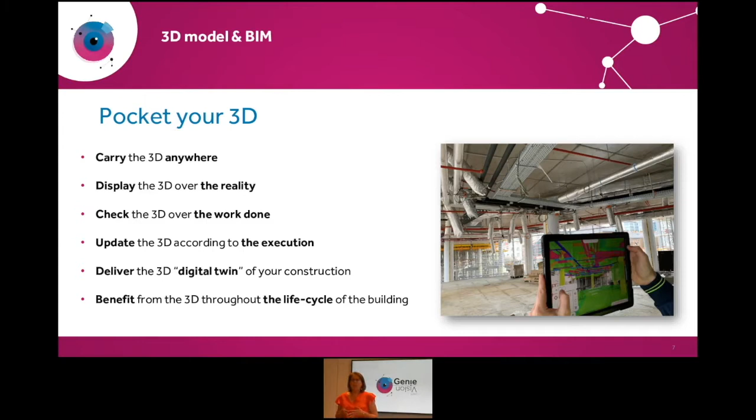Having this picture in mind, GenieVision has worked on building a solution which is open in the way that it's really easy to integrate into the ecosystem of a customer, using cutting-edge technologies as well, but for the end use of the user on site, focusing on collaboration and user friendliness.

So to summarize, we have a solution that allows us to carry the 3D model on site, to benchmark this 3D with the reality, and do different kinds of reporting to digitalize the documentation.

If we have to really briefly describe the work process of GenieVision, it's really simple at the end. We have a 3D model which is edited by a CAD system. This 3D model is loaded on a web portal, processed and made available through a mobile application for the operator on site doing this control.

So during the control, we collect different elements. Those elements we can retrieve back to the web portal. But I will stop here.

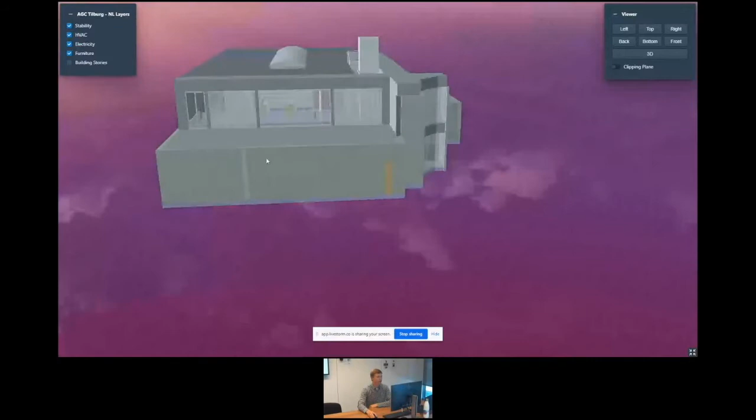We provide you with some viewing possibilities so you can manipulate your file, go around, do some clipping operation to analyze and see whether this is the version that you're interested in and if you're happy with what you have uploaded.

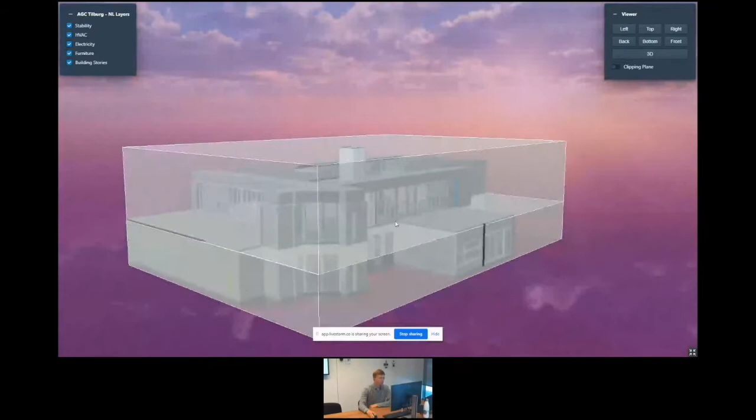We also provide you some useful information about how we are going to split your model into small pieces, most of the time only building stories. So these white boxes here are showing to the end user, to the BIM collaborator, how we are cutting the model into pieces.

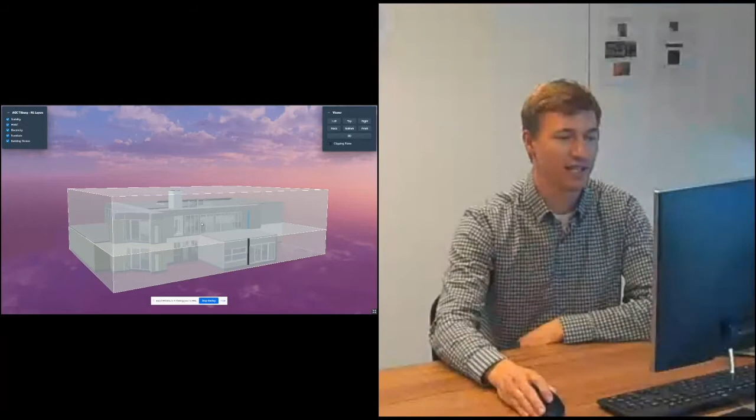We will also provide some tools to adapt these boxes, which are now derived automatically from the model. But once we complete our development for next September, you'll be able to manipulate these boxes and decide where you want to cut your building and in how many pieces.

Going back to a new project, in here I've got a stability file that was uploaded earlier. I have many different versions of that stability file in IFC, Revit format, or IFC zip.

And for the sake of the demo, I will upload an electricity file in this additional folder here. So the process has been developed to be very, very simple: you just take your file, upload it, and an automatic data transformation process is triggered.

This is triggered on our server on the cloud. While it's processing, I will guide you through the other tabs. You've got members, where you can...

add all the members of your organization or invite new people to your project. Once you invite people, you can decide to assign them a role that will limit or give them possibilities to work on your project.

All these people invited to your project as members will gather many issues that will add up along the way, and that will populate gradually our database with your as-built documentation, because you will have pictures of reality, pictures of augmented reality, and some documentation all along your project. All our pictures are located in 3D within your building, so it makes useful information at the end of your project.

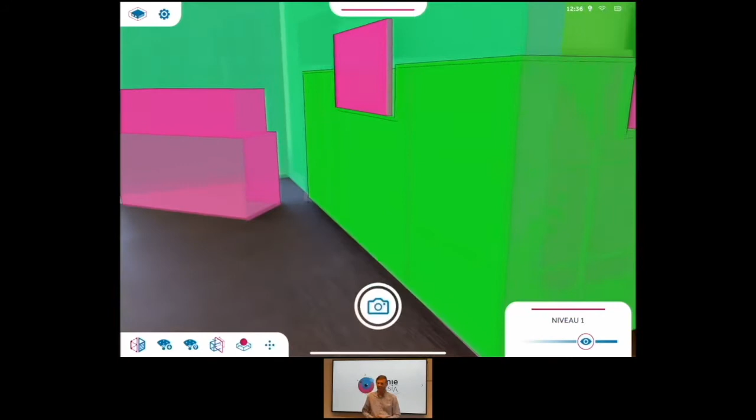This process will be soon fully automated in the next release, so it's really coming in a few weeks. So here, I'm just checking at that place the alignment, and I'm saving the position. The objective to save that position is that myself or even a colleague can come back afterwards on that exact place and relocate himself in 3 seconds with an already calibrated model. So that's clearly the purpose.

So here, let's say I'm coming back the day after, and I'm relocating on that place where I have saved my point before. As you can see, in 3 seconds, the model is exactly calibrated and aligned on the position where I have saved it. I can easily also check with the transparency if all elements are on the right place.

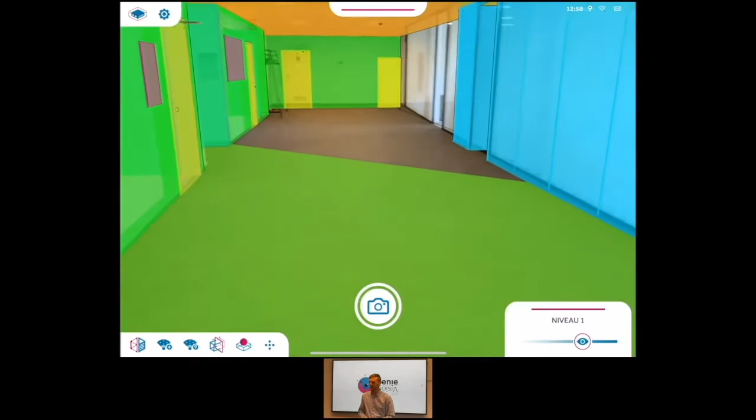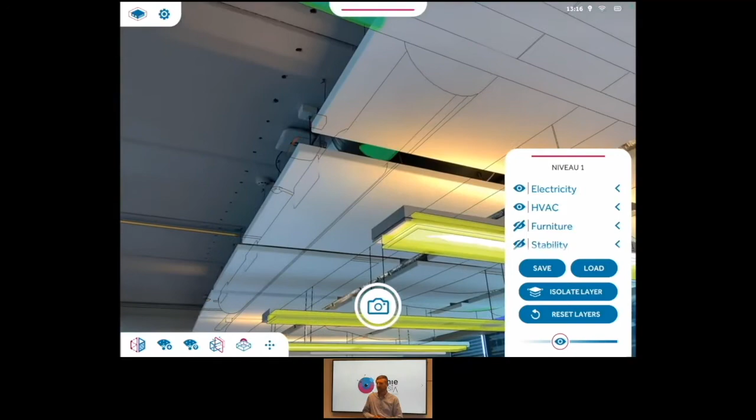So I'm entering in another room, and I'm going to check some techniques on the roof. As you can see here, I have different layers on the right column that I can manage, so I can hide, unhide the elements that I want to discover or to check. And I can also use the mixed reality visualization tool in order to check if there are, let's say, false ceilings on the roof.

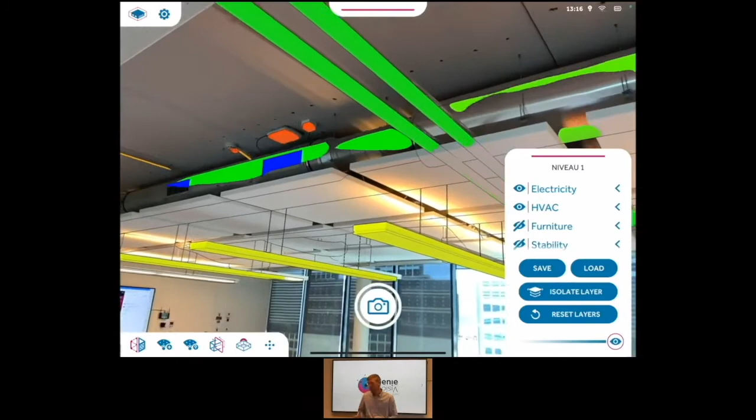You can see elements behind other elements. That's really the purpose of it. And you can also verify that also the model is correctly positioned with the outline of the 3D model on the reality.

This is clearly also a visual comfort in order to really check the position of each element of the model and on the reality.

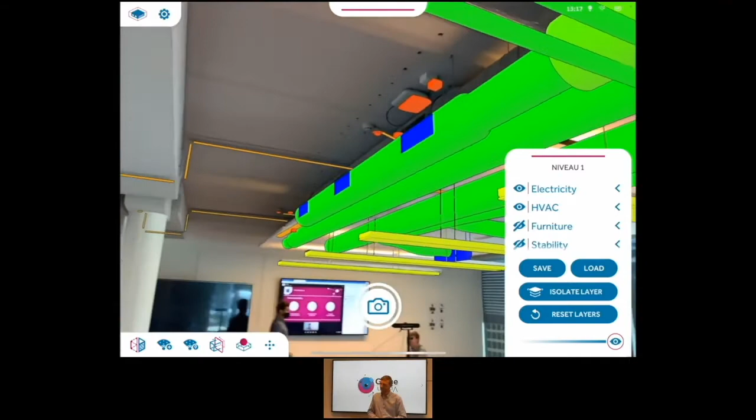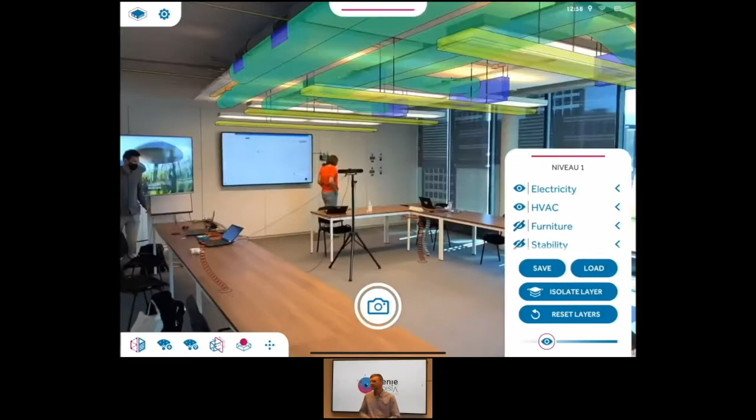Here, clearly, we have identified that some pipings were placed too high compared to the original 3D model. So from here, you can also directly report this non-conformity that you just have found out.

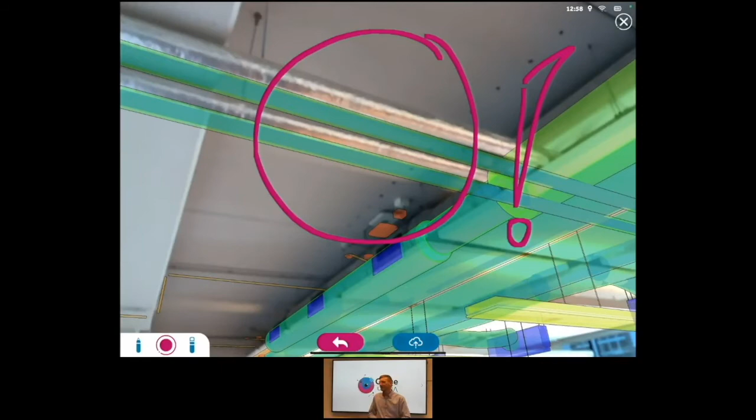Voilà, you take the picture, and in our app, there is an integrated annotation tool and an integrated reporting tool that will give you the possibility to give some details about the non-conformity and problem that you have encountered on your work site. So in this case, let's say it's about the piping that was placed too high.

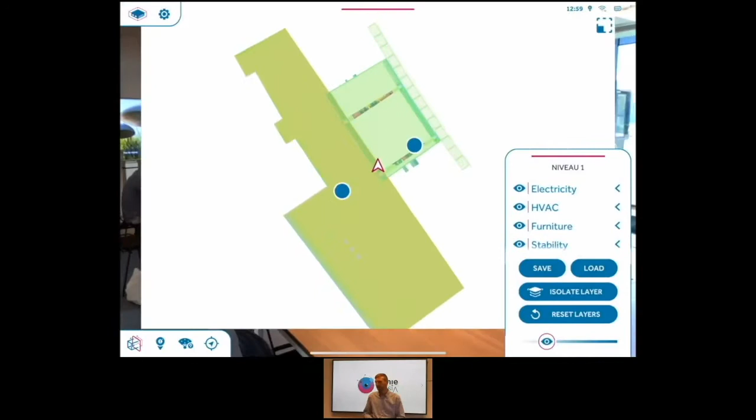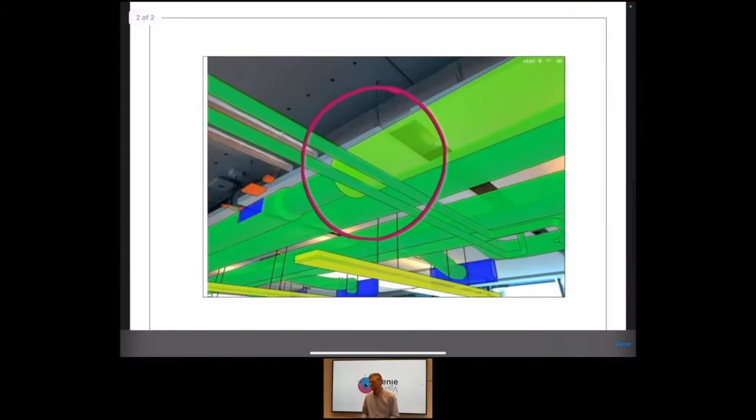And once that report is fully detailed with the type of issue that you can give, etc., you can make more pictures if you would like. And you can find back directly also your report directly on the minimap. So each user can see every non-conformity generated by others, and you can also visualize from the app directly the immediate generated report that you can also find back on the portal.

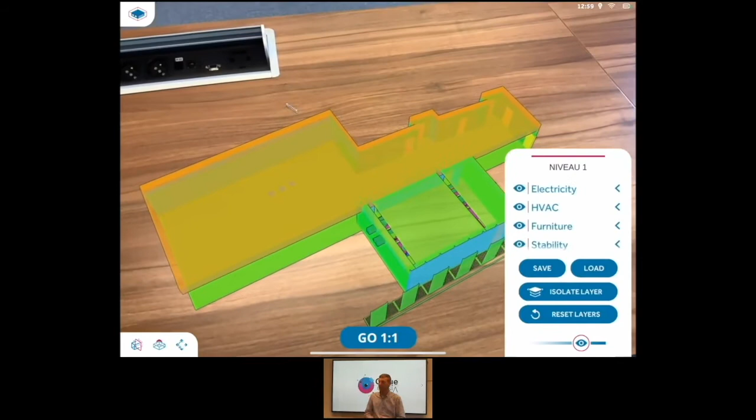Another interesting visualization tool is what we call the tabletop viewer. So during a meeting, you can also easily show up directly through the mobile device your level or your 3D model. You can find back all the same functionalities as the layer management, the XYZ transversal sections, in order to visualize fully your model during a meeting with colleagues and exchange on the topic.

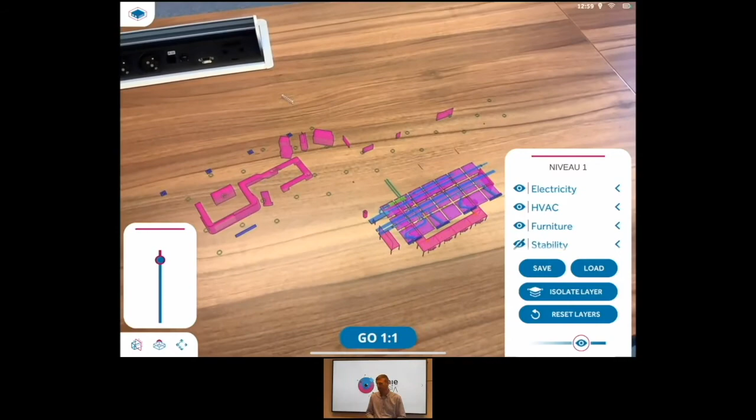You can rotate, zoom in, hide and show the elements, and also directly from that point you can also switch back from the 3D view into the reality.

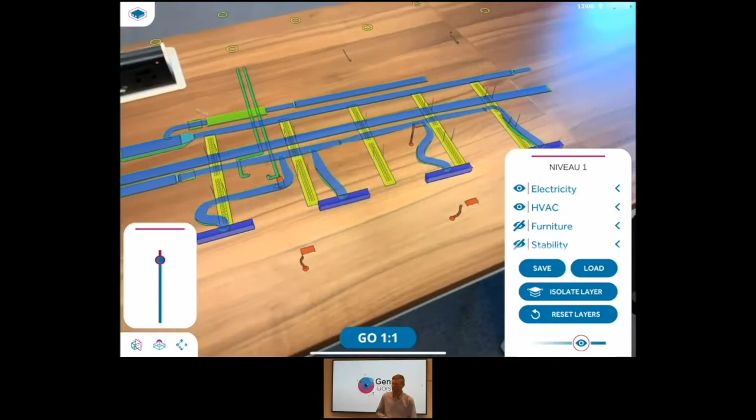So here we are adding again the layers for the visualization, and you can modulate a bit and handle your model directly and exchange or share comments directly with your colleague.

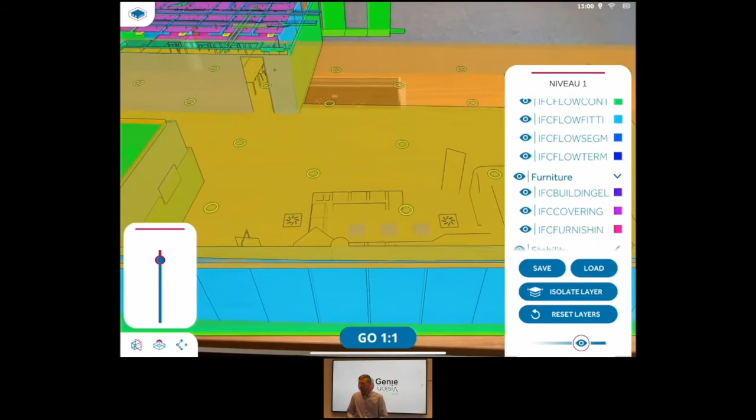Here in the layers, you have also included all your sub-layers. Again, on that tabletop view, you can hide and show the elements that you want to see or not see.

And now I will give back the word again to my colleague Jean-Pierre.

Sorry, this is still far for me. So yeah, the purpose really of GenieVision is to bring your 3D on site in order for, of course, having a higher comprehension of your 3D model overlapped on the reality, so work with much more visual information in order to enhance the team coordination and collaboration directly on the work site.

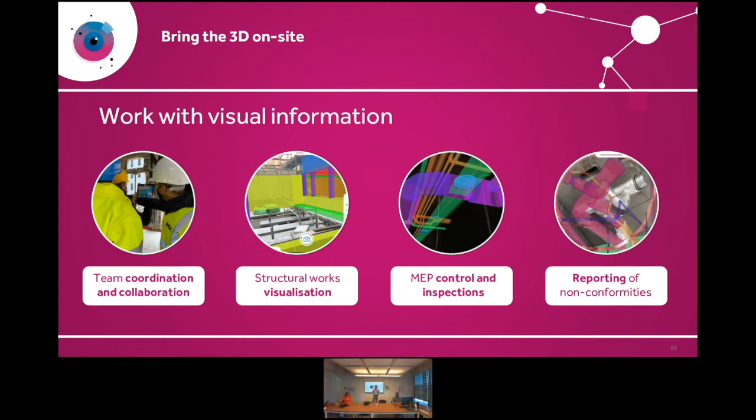Having a better visualization and follow-up during the structural works, for instance. Also increase a higher control and inspection of all the MEP, and having a more detailed reporting of all the non-conformities that you have encountered on your work site that you can report, of course, to re-upload afterwards the data and enrich your as-built by collecting all this data.